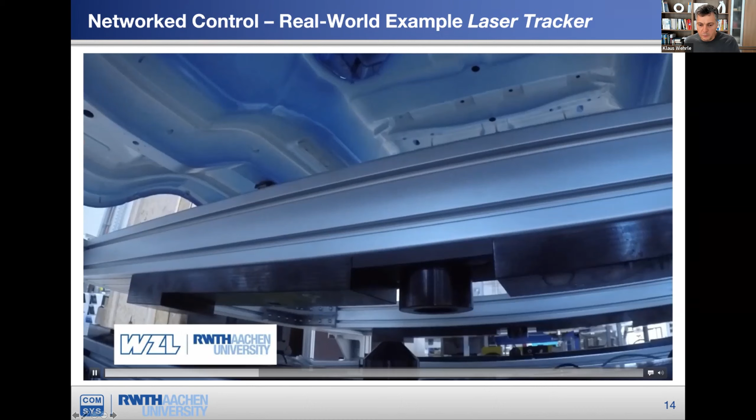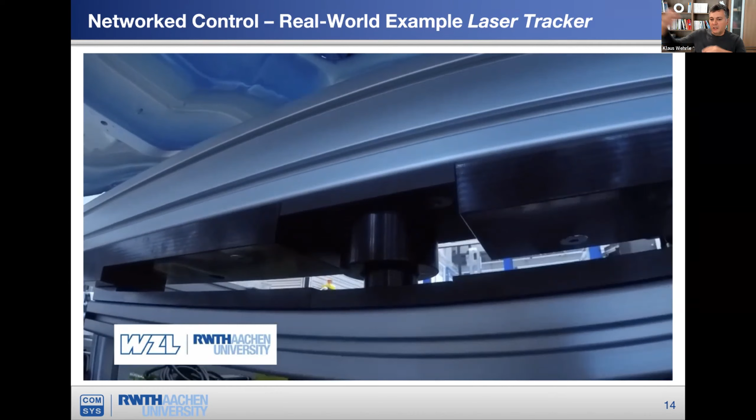But the problem is the results from the laser that tracks the distance to these components are first pre-processed in a computer, and then when you have the coordinates of these components, they are sent to the controller, which controls the movement of these things. In that process, you have a transformation of coordinates, which I'll explain a bit later — intermediate processing steps which have to be done, and these are actually quite slow.

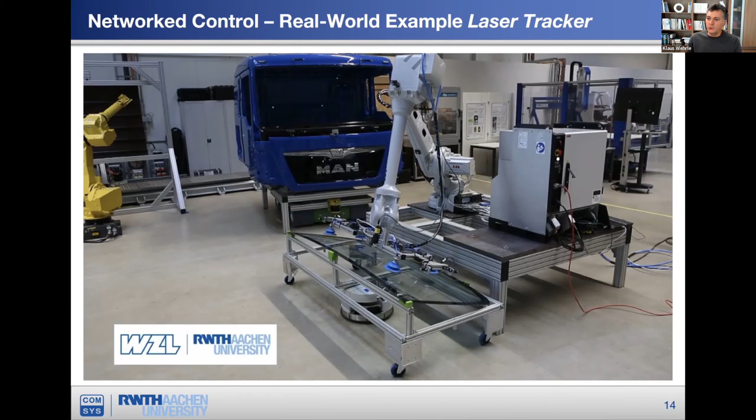Because they are done in the cloud, what we try to do is push these computations into network elements in order to speed up the process much more. If we are successful, this robot can move at 10 times or 50 times its speed.

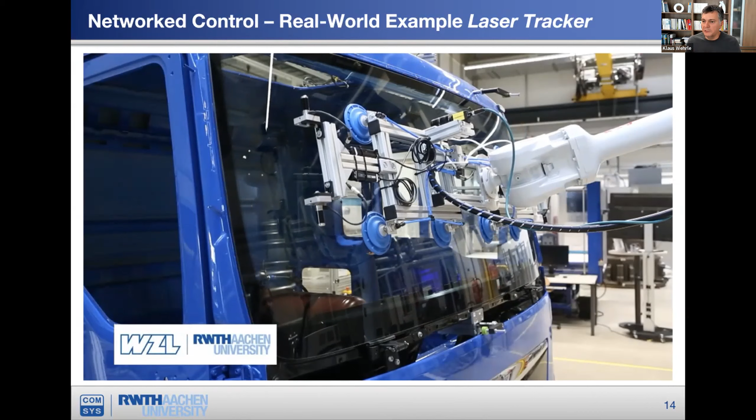So getting the actual physical position of these devices and coordinating them is at the moment the bottleneck. Okay, let's move forward to the next slide.

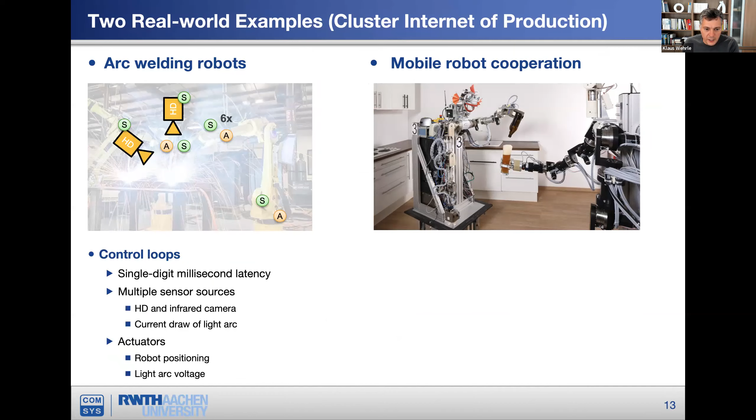They change a lot. And for example, such a use case as I showed in the movie, I was also surprised when I saw that the first time. In such a robot, you have something like 6 up to 10 sources or sensors, and they are not connected via one cable. They are all individually connected. So you have to bring them together in a switch.

And that's why I always say the switch is, in my opinion, the nearest point to the physical process where you can push that. So for example, the controlling of the robot is one interface. The arm and the actuator here are multiple interfaces which have individual network interfaces. The movement and maybe some positioning and other sensors are also individual components which are not directly connected. They are then connected at the switch.